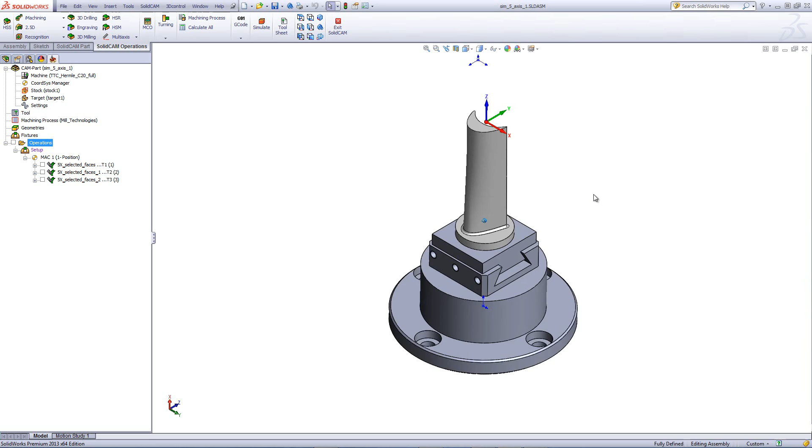In this recording, we'll demonstrate the use of multi-axis simultaneous machining on this turbine blade. We'll start off by doing a semi-finished cut on this surface going down over here. And if I were to open up the operation, we'll be using the option of parallel cuts. The geometry itself is the surface going around the part itself as shown over here.

And the tool we'll be using will be a 16 millimeter bullnose tool with a 4 millimeter radius on the corner. If I go into my levels, you'll note that we'll be using the clearance area of cylinder. If I were to go down now to my toolpath parameters, you'll see that we'll be stepping over every 5 millimeters as we are leaving 0.2 millimeters from the surface itself, leaving for a finish cut.

If we were to go into our tool axis control, you'll note that we've tilted the tool also to work at 20 degrees. This way we're working on the radius part of the tool and not on the center of the tool. I've also used the gouge check to check the surface on the bottom to make sure that the tool does not touch any part of the bottom surface as it's going down on the part.

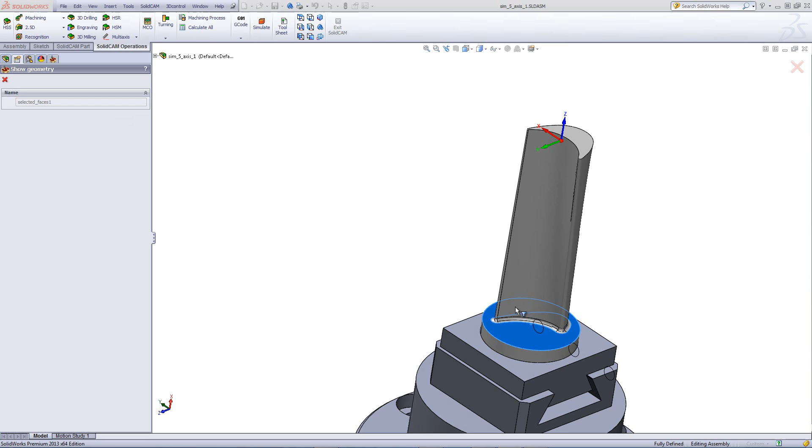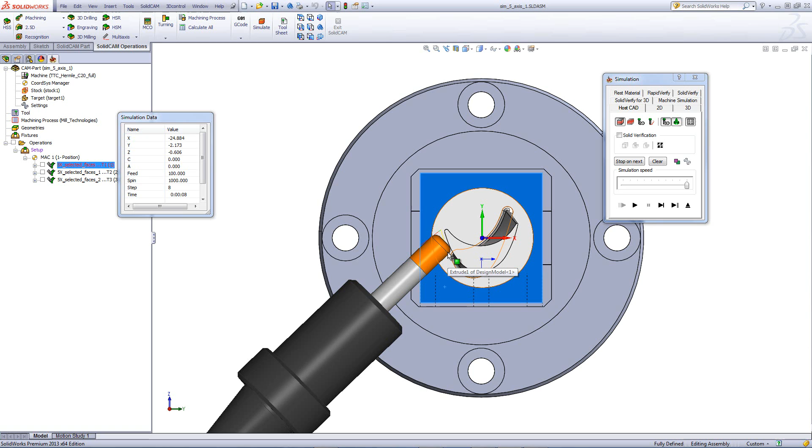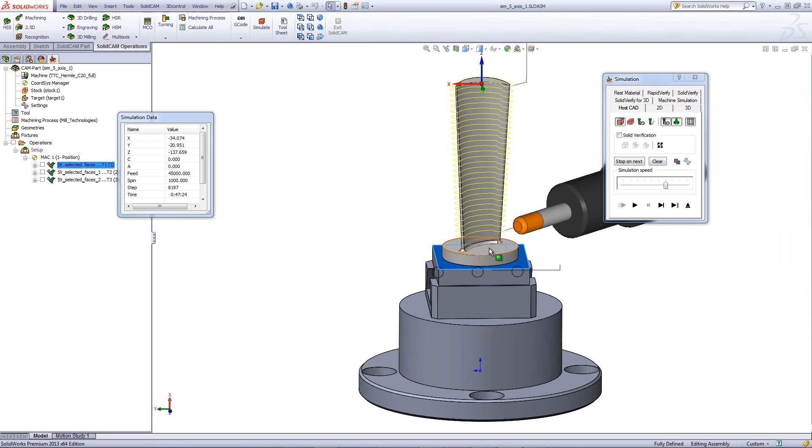If we take a quick look at the simulation, you'll see that the tool comes in, and if I take a look at the top view of the part, you'll see that it's turned 20 degrees away from the center, working on the tool radius of the tip of the tool. Going back to my regular view, you can see that the tool now works around until it gets to the bottom. And note that when it gets to the very bottom, it'll only go as far down as not to gouge the very floor that I asked it not to touch in my gouge check.

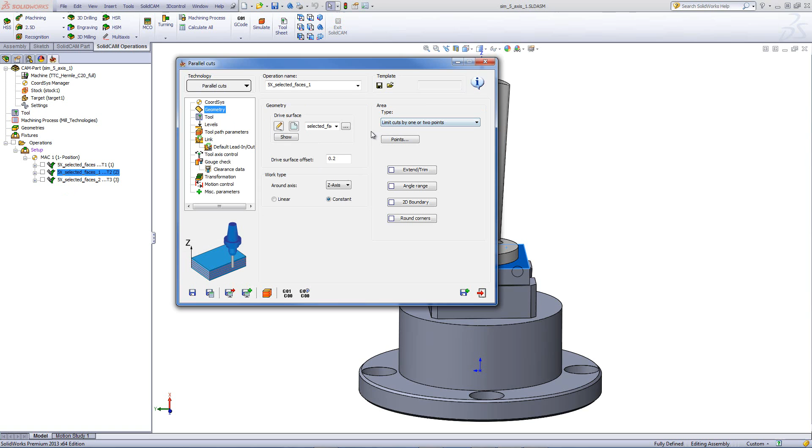Now for my next operation, I'd like to continue working on this surface over here, but to complete only the area where the previous tool could not go further down because it was a relatively large tool. So for that, I've used a smaller tool, as you can see in the operation itself, an 8 millimeter bullnose tool with a 2 millimeter radius. And if I go back to my geometry, you'll note that I limited the surface to work on between these two depth points over here.

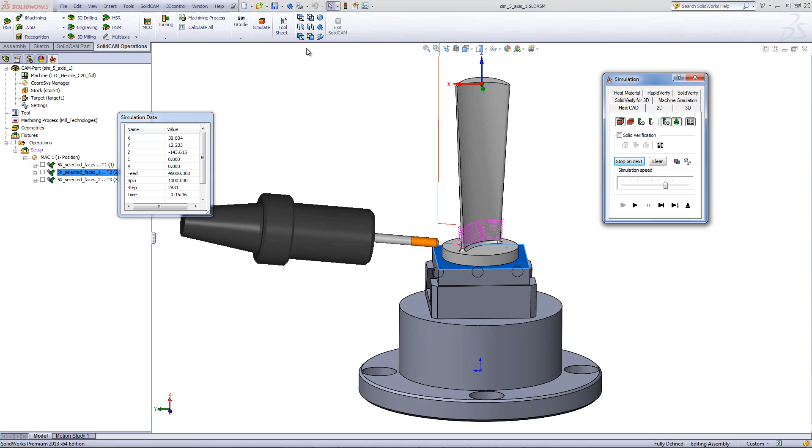If we take a look at the simulation itself, you'll see that the tool goes in and works only between these areas over here, this surface over here and that, and we still have the gouge check, so it would not harm the very bottom of that part. Also note that if I take a look at the side view, the tool is also tilted in this case up by 10 degrees. If I go back into the operation, you can see that in the tool axis control, not only do we have a lag angle of 20 degrees like we had before, but we also have a tilt angle of 10 degrees as well.

Now for my last operation, I'm basically doing the exact same thing as I did in the first operation, but this time I'll be doing a finish cut with a smaller end mill. If I were to open up the operation itself, you'll see that again we're using the parallel cuts with the exact same geometry. And if I go into my tools, you'll note we're using an 8 millimeter bullnose tool with a 2.5 millimeter radius. Going down to my toolpath parameters, since I'll be doing a finish cut, my maximum step over will be much less than it was before.

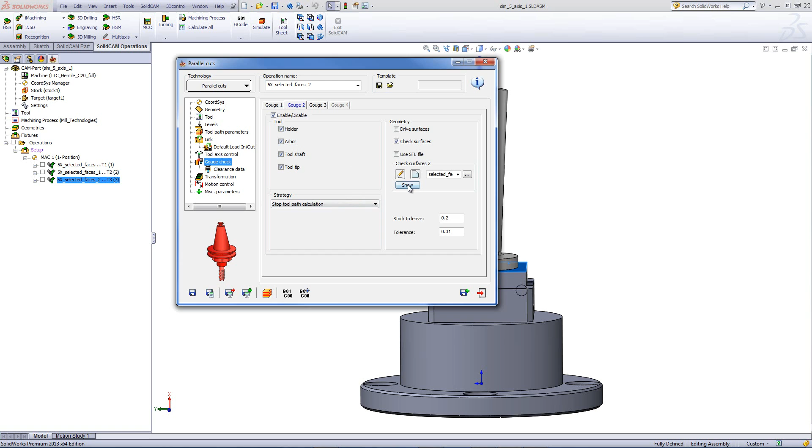Also in my tool axis control, again I've used the option of lag cutting direction and the tilt angle at the side of the cutting. Of course, I've used the gouge check again to make sure that it does not touch any part of this surface over here. Taking a quick look at the simulation, you'll note that the tool goes down, and if I stop it for a moment, you'll note that we have the angle on the side over here, so that it does not touch the center of the tool, rather it works on the ball of the tool.

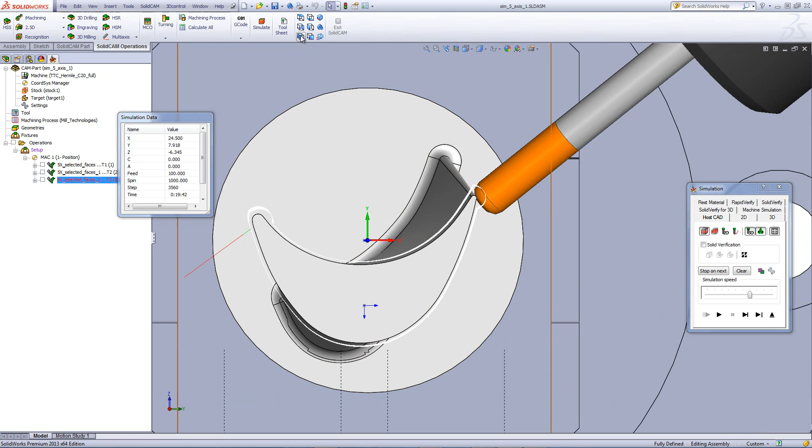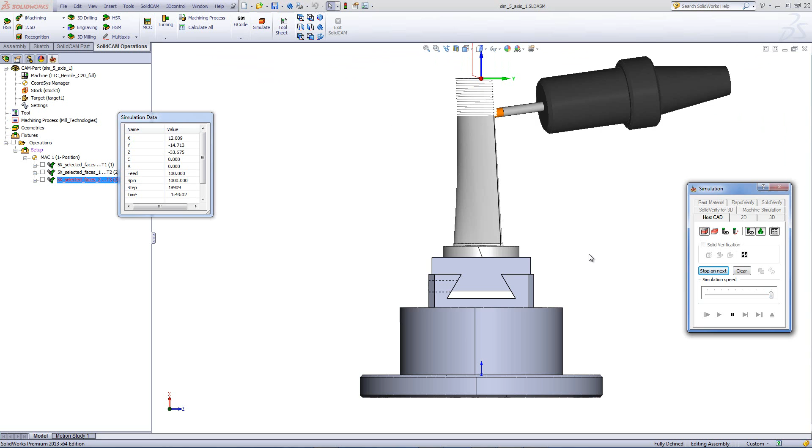And if I look at the side view, you'll note also that it's working on a specific angle of 10 degrees over here, allowing it to go even deeper onto the part without touching that wall. Completing the simulation, you'll see that it'll go down as far as it can on this part, completing that surface all the way towards the bottom.